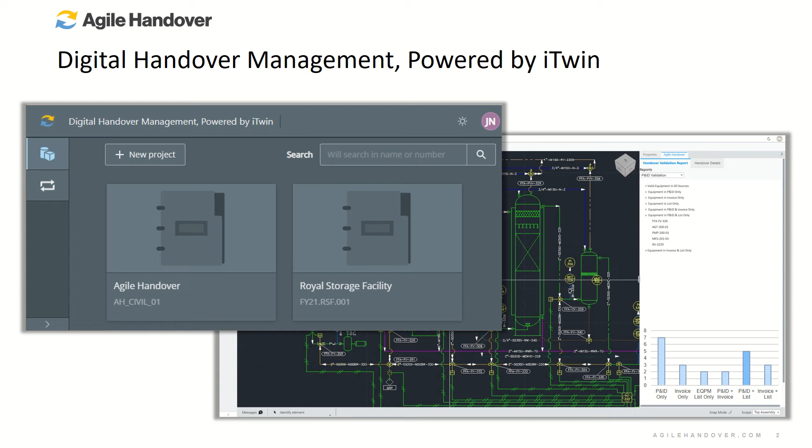Agile Handover is a technology and consulting services company that provides the leading handover automation solution in the infrastructure community. Digital Handover Management, powered by iTwin, is designed to digitize existing handover procedures, reducing customers' handover validation and curation costs by 50 to 90%. Bentley's iTwin platform provides a uniform foundation to access disparate engineering models, which allows us to focus on the data, delivering our added value of providing automated handover solutions.

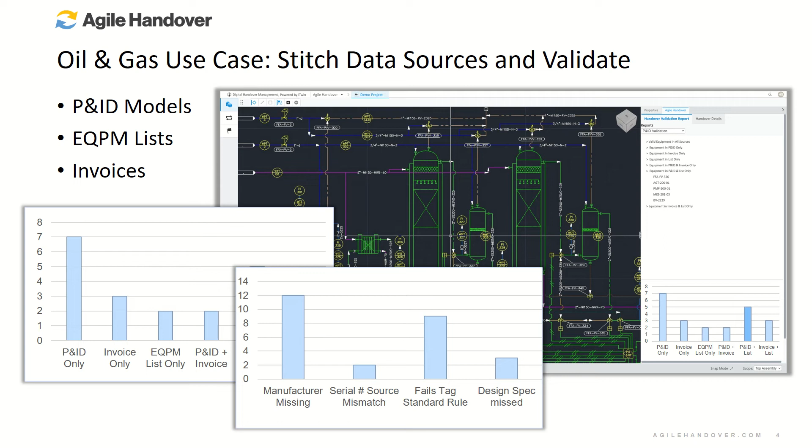For the following use case, I will focus on a chemical storage facility. The customer, as an owner, wanted to automate two things. One, ensure the handovers they receive at project milestones meet their deliverable requirements, and two, at the final project closeout, automating the transformation of the project deliverables into O&M.

First, I will review how the information is stitched together. You can see in the model a large storage tank, several emulsifiers for mixing chemicals, and pumps for circulation. Within the Agile Handover tab on the right, we can see the name tags we extracted about the pump from the different project sources, the P&ID, equipment list, and invoice.

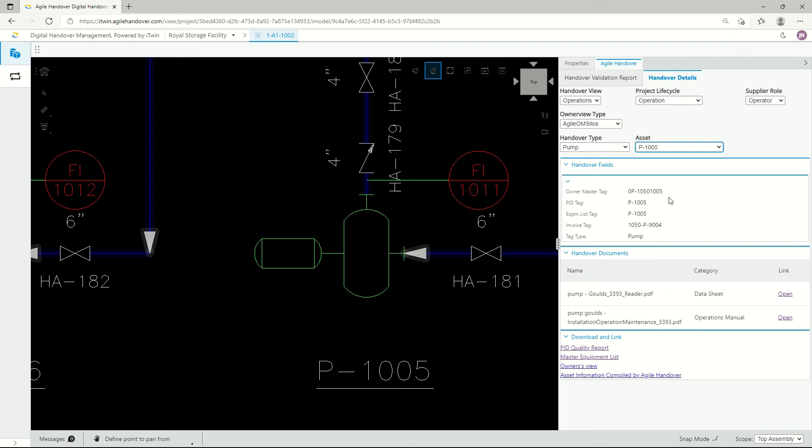To accomplish this, we apply the project standards to the handover rules and extract from the various deliverables, stitching the information based on engineering logic. Meaning the old days of manually changing the sources every time they need to be combined for submittal review can now be eliminated. Just set up the handover rules once and they are stored forever.

Next, we will dive into the customer's handover review process. They wanted to automate the following time-consuming and repetitive activities. 1. Did all the major equipment that had a paid invoice end up within the master P&ID drawing? We can see that pump 1006 is not in the invoices. Perhaps it was renamed later during the project lifecycle. Not sure, but now the owner can inform the project team of the concerns.

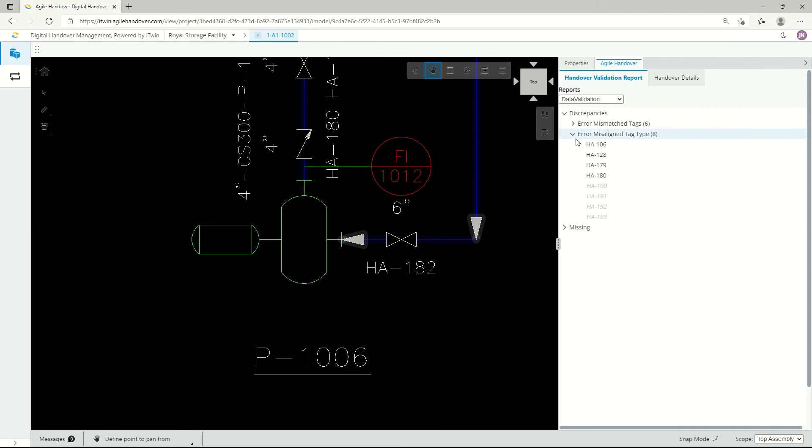Number 2. Did the submittals meet their equipment tag naming conventions defined in the standards? It looks like some of the valves had the wrong tag abbreviations, and they need to be renamed to align with the standards. Number 3. Was all the required asset data needed for O&M captured? We can see some of the valves are missing manufacturer information in the master equipment list and need to be completed.

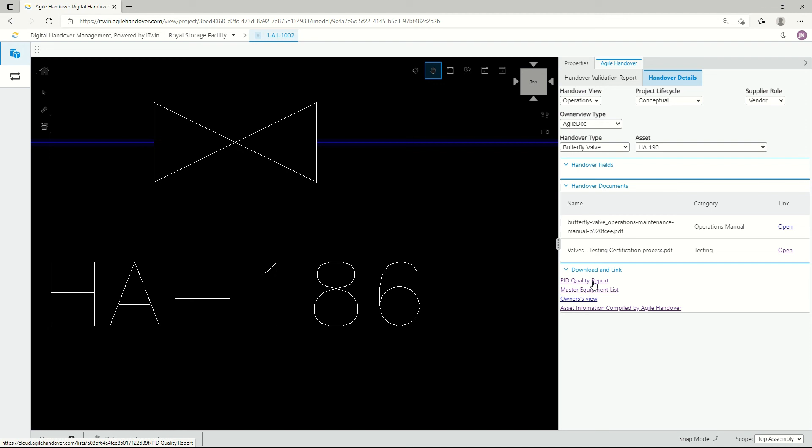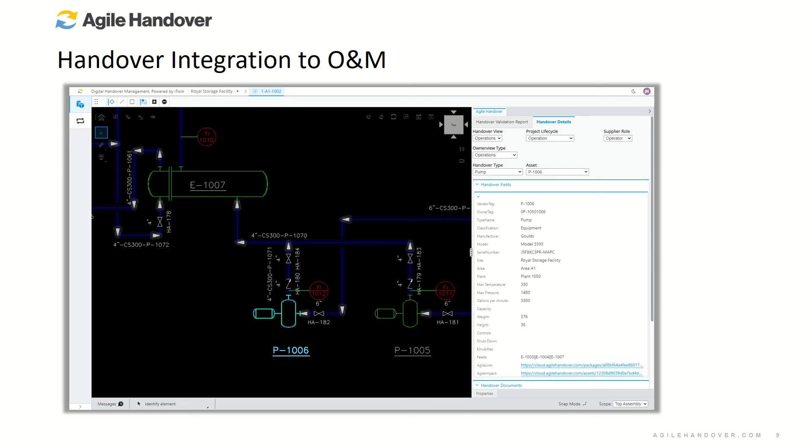And finally, number 4, do the assets meet the criteria from the design specifications? We can see that butterfly valve 186 is not meeting the maximum temperature threshold of the valves. This could cause problems. Once all this information has been reviewed, it can be published inside the P&ID Quality Report. The report can be shared with the contractor teams working on the projects. Now we can see the details of the report and get a clear picture of the items that need to be resolved. Agile's Handovers reports can be connected to any dashboard visualization solution.

Finally, we will move into the future, forward in time to the final project closeout. On the right, you can see all the information displayed about the asset is federated. It comes from the disparate project contents and has been transformed based on the owner requirements. We can even see and have access to all the related documents that were discovered in the handover projects.

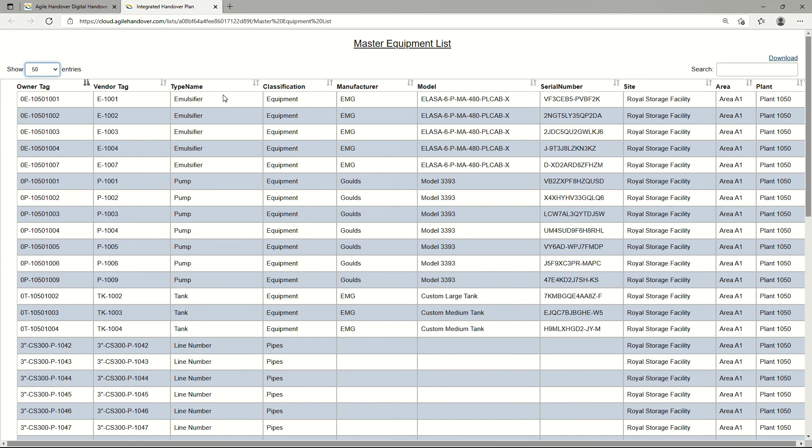And finally, we will go ahead and take a look at the consolidated master equipment list view of the handover data, formatted in this case for loading into a CMMS system. We can repurpose and load the handover data to any O&M system utilized by an owner.

The last piece we want to look at is the impact analysis. We can see that this pump is feeding 3 different emulsifiers, which eventually lead and provide the fluids into the tank. We harvest and stitch not only object data sources, but also all the relationships we discover between the different objects to help customers understand the object dependencies and the impact of change during O&M.

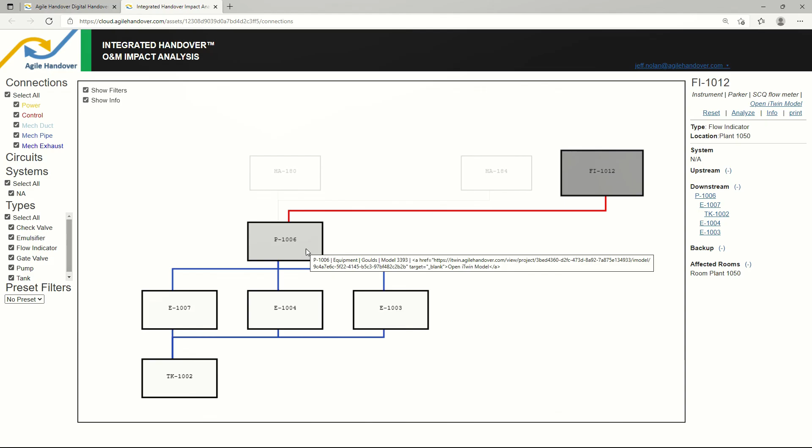In summary, we ensure disparate project deliverables are verified and handed over consistently, providing a standardized and repeatable process for reviewing, aggregating, and integrating handovers into O&M.